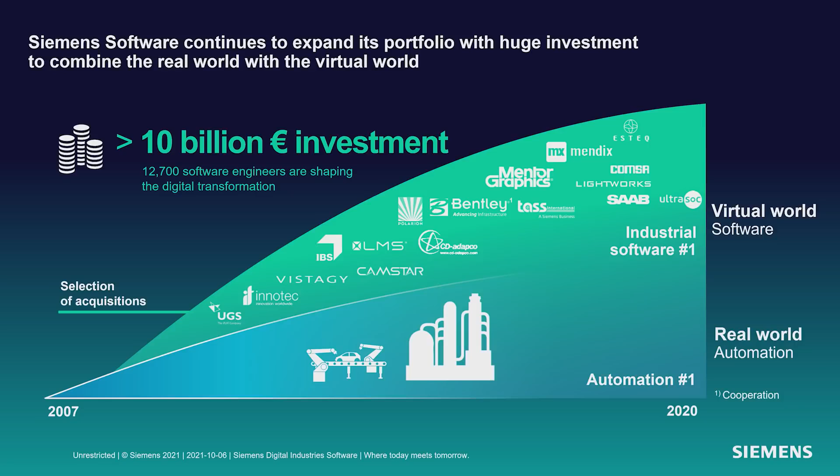One of the reasons we're able to do this is our investment. Over the past 14 years, we've invested more than €10 billion in bringing in new functionality to Siemens. In fact, Siemens is one of the top 10 software companies in the world. This allows us to bring you Xcelerator. Xcelerator is an integrated portfolio of software, services, and application development platform that really speeds your digital transformation. So no matter what you're doing, whether it's mechanical, electronics, manufacturing, we have you covered.

And it all starts with Solid Edge. Solid Edge is your on-ramp, if you will, to digital transformation. You're probably familiar with lots of Solid Edge capabilities for sheet metal, 2D drafting, etc. But maybe you need to go beyond that with the whole Solid Edge portfolio and Xcelerator, whether that's managing that data, doing technical publications, simulation, electrical, it's all there for you.

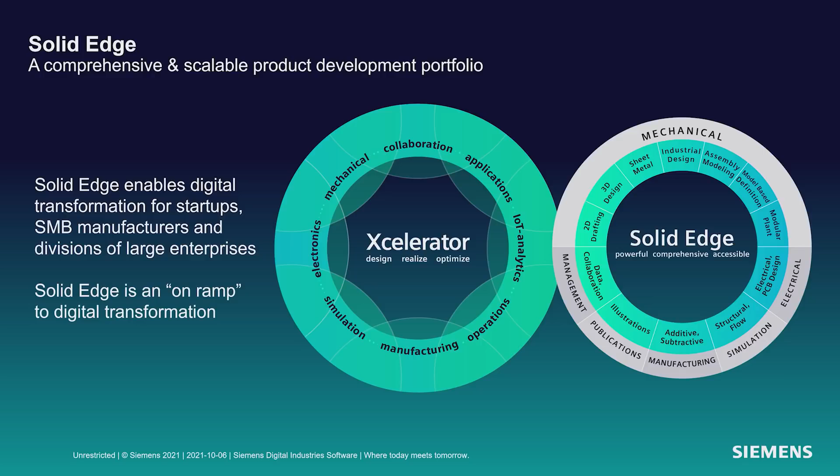And what we see is customers doing amazing things with Solid Edge and the Solid Edge portfolio. For example, Innovates. Innovates is a company in Belgium that makes mobile charging stations. And they're able to take Solid Edge and PADS Pro and use those two together to do great things. As you see, they don't find that level of integration in other engineering software.

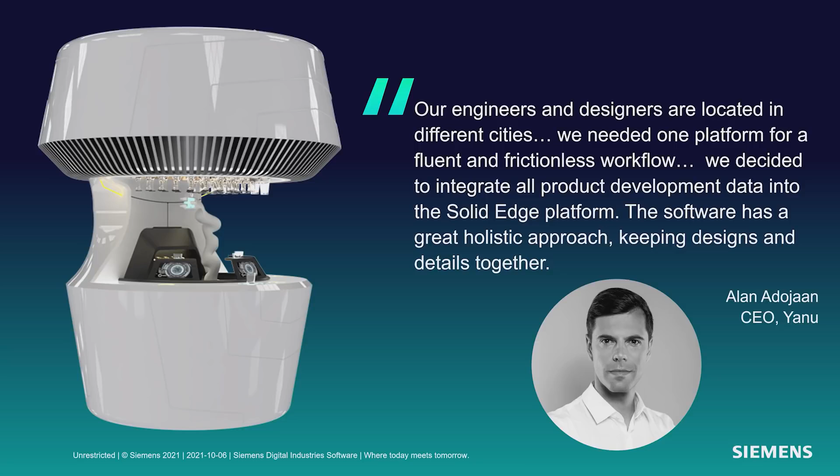Another great example is Yanu. They make the beautiful product you see on the left here. What product might that be? Probably something you've never seen before. This is a fully automatic digital bartender. It can recognize you, make the proper drink, do the proper billing, all contactless, very important today. And I love what Alan has to say. The software has a great holistic design approach, and that's what we like to see and how we can bring you more productive software.

So let's talk about Solid Edge 2022 itself. Solid Edge 2022. Engineered to grow your business. There's so much in it, we'll only be able to cover some of it today. Things like Xcelerator Share, allowing you to collaborate with customers and suppliers. Or CAD Direct, bringing CAD files from other systems directly into Solid Edge seamlessly. Point cloud visualization, big scans of plants, being able to design your equipment in context of that big scan. Solid Edge Design Configurator, a whole new capability to configure your designs quickly and easily for your customers.

Now, as we go through our discussion today, we're going to be using two different data sets because there's just so much to see, such a broad range of functionality with Solid Edge. We'll be working with an espresso maker from Fiamma, a company based in Portugal. And we'll also work with a product from Bergner, a company based in Switzerland that makes chemical and pharmaceutical custom machinery.

So let's start by talking about mechanical design. And let's start with CAD Direct. CAD Direct lets you seamlessly integrate data from other systems into Solid Edge without translation and automatically take updates. We'll also talk about convergent modeling. We've been working on this technology for several years now. It's getting very sophisticated. The ability to integrate mesh models with BREP or solid models in one seamless way. So let's look at that with Jeff now.

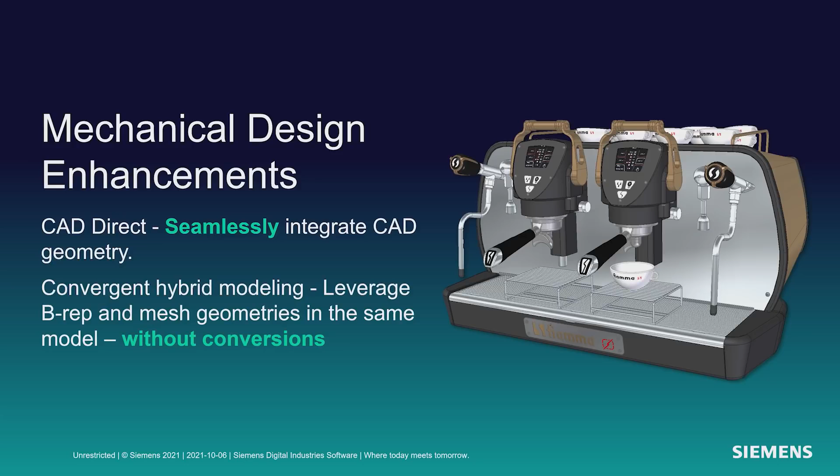Thanks, Dan. First, we'll take a look at subdivision modeling. In this example, we will add support members to the base of the Fiamma espresso machine. The new subdivision bridge command can be used to easily connect edges or faces of subdivision cages and create a lofted structure between them. Here you see an example of that, where we'll select the faces of each subdivision model that we want to loft between.

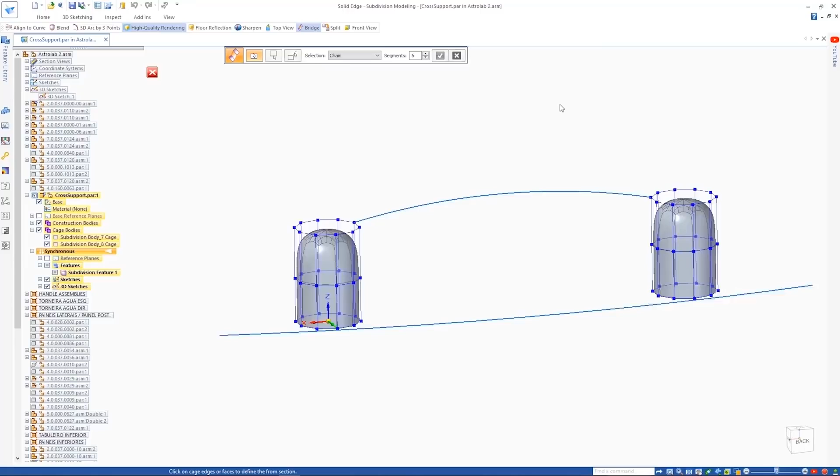Then we'll add the control curve to help us further define the overall shape. Next, we'll be using the new Align to Curve command to further define the shape of the part. Simply by selecting the cage vertices to define the direction and then picking the curve, those vertices are automatically mapped to the curve. You can even sketch your own shapes and curves inside the context of the command. Even gesturing is supported for inking of your curves.

Here we'll show another option called Split with Offset to add some pockets to support the rubber feet of the support. A simple selection of the edges with an offset allows you to pull to create the pockets for those rubber feet.

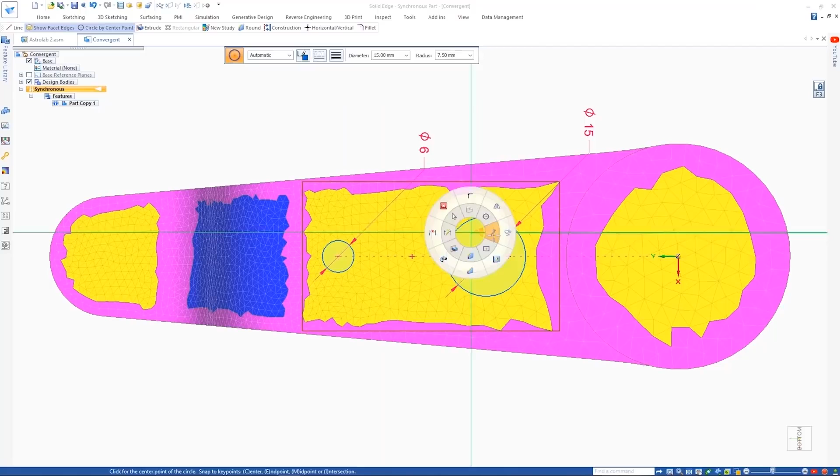Next, we're going to replace the handle with a new design that's been 3D scanned. The result is a mesh model that we import. We can visualize the mesh with the new Show Facet Edges command. In this case, we'll clean up this model a little with the Remesh command. Now, faces have automatically been identified and the sketches are added to the planar faces of the mesh.

We add a series of cutouts in order to reduce the weight and improve the appearance of the part. Notice the resulting geometry isn't faceted. Solid Edge now seamlessly combines mesh and B-rep geometry in the same body or part. We'll add additional cutouts to reduce the material. Once the cutout is complete, it can be patterned.

Finally, we're back in the assembly where we'll replace the current handle with the new meshed handle. But you'll notice the mounting holes are missing from the component. This can easily be solved by doing a Boolean operation using the mesh model as the target and the components from the assembly as the cutting geometry. These new capabilities further enhance your ability to use mesh models in your design process.

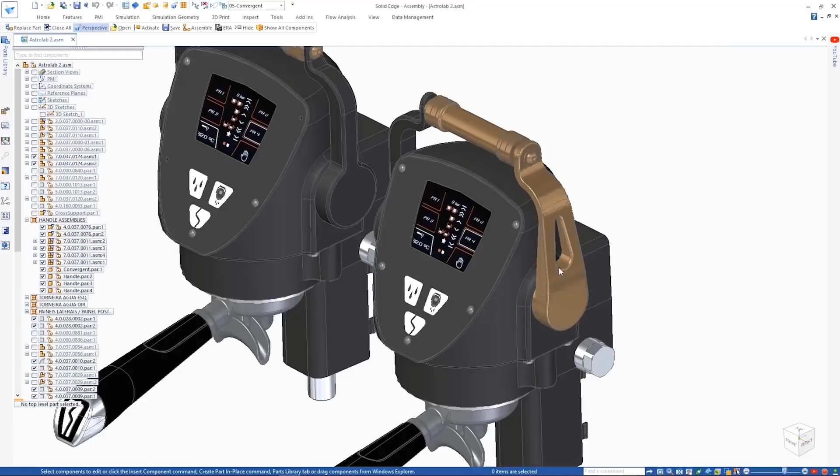Now we'll use the new component finder in the Solid Edge Pathfinder and we'll search for the desired filter holder handle, which is designed as a family of assemblies. One of the versions is designed for a double espresso shot, the other is a single espresso shot. Opening the drawing of this assembly, we'll use the new family of assemblies parts list to place a table and detail the parts used for each member.

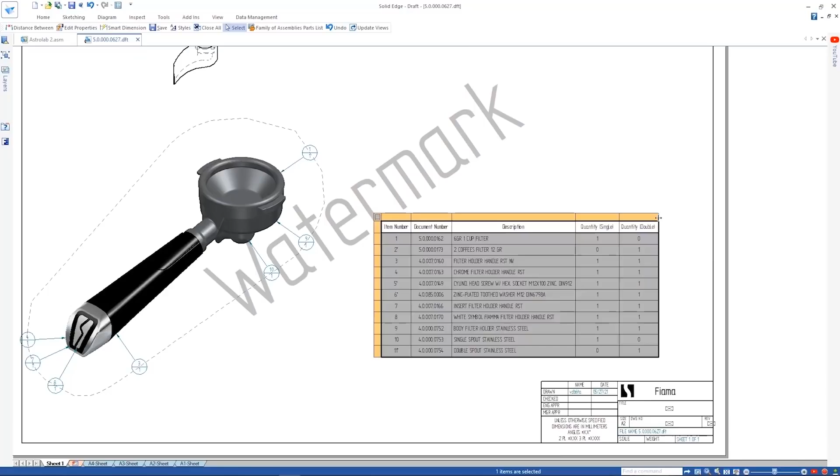Now we'll look at some enhancements to dimensioning in Draft. Dimensioning to virtual intersections or arcs of rounded edges is now supported. We can also choose to display projection lines to those intersection points. Watermarks are also used to convey important information on the drawing. We'll change the existing one so that it retrieves the document status for the drawing property text.

The new CAD Direct command enables us to use foreign CAD data, geometry, and assemblies in Solid Edge directly without requiring any translation. The coffee boilers that you're looking at here were designed in NX. Once inserted into Solid Edge, they can be positioned just like any other assembly. Since we need two of these, we'll simply copy one to create the second.

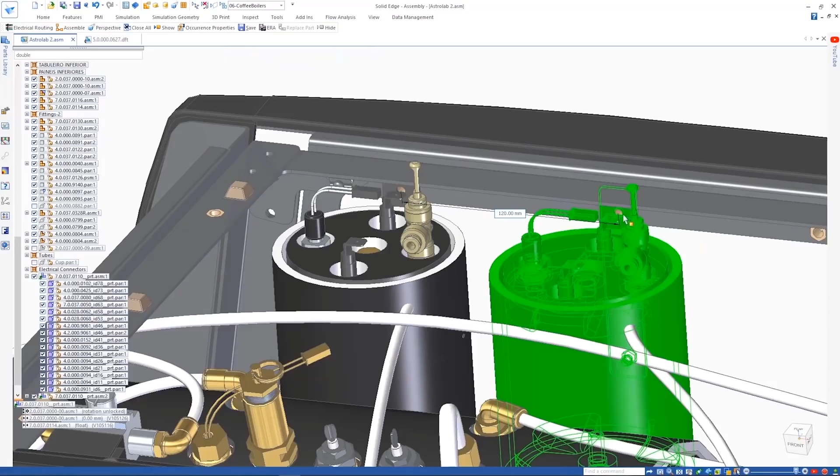Notice the boilers aren't quite in the right location. We'll go back into NX and make the changes needed to the mounting bracket such that they'll be in the right position. Since Solid Edge has associative links with NX, a simple update brings the changes in.

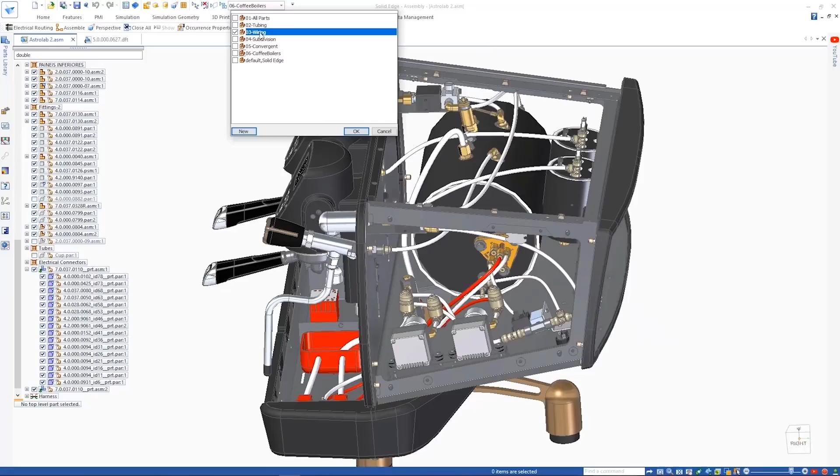Next, we'll look at electrical routing enhancements. Solid Edge now supports the display of bicolored wires, allowing us to change the display of this ground wire to be striped green and yellow. Various pattern types are supported as well, including single stripes, helical stripes, zebra stripes, and dashes.

And finally, KeyShot, the best-in-class rendering solution, also sees some impressive updates. Decals defined in Solid Edge may be automatically transferred, saving time and effort, which can be seen here on the logos and the cups in the digital scene.

Back to you, Dan. Thanks, Jeff.

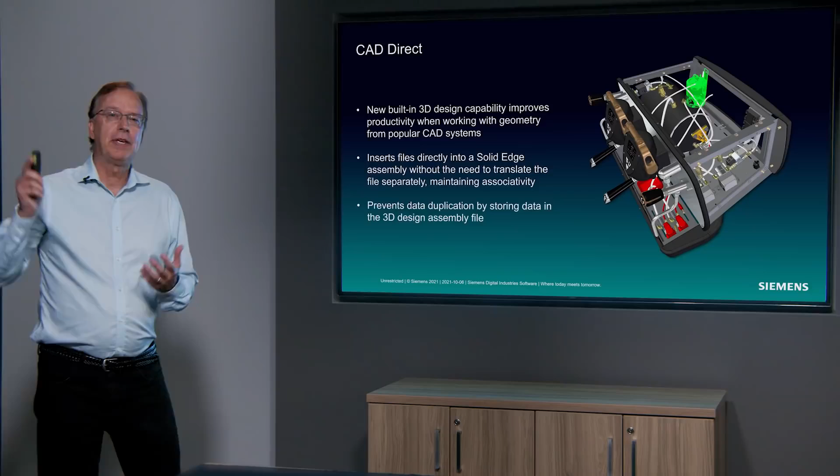Lots of amazing stuff in there, but I'm only going to highlight a couple things here that I think are real game changers. CAD Direct. So you have the capability you've seen to get an NX assembly into Solid Edge directly, no translation. And when you make edits to that NX assembly, it comes into Solid Edge automatically. There's no extra files to manage. You don't have to worry about that. It's all CAD Direct.

And what about convergent hybrid modeling? You saw taking triangle meshes and B-rep solid models, pulling that all together into a single cohesive model, significantly reducing your design time.

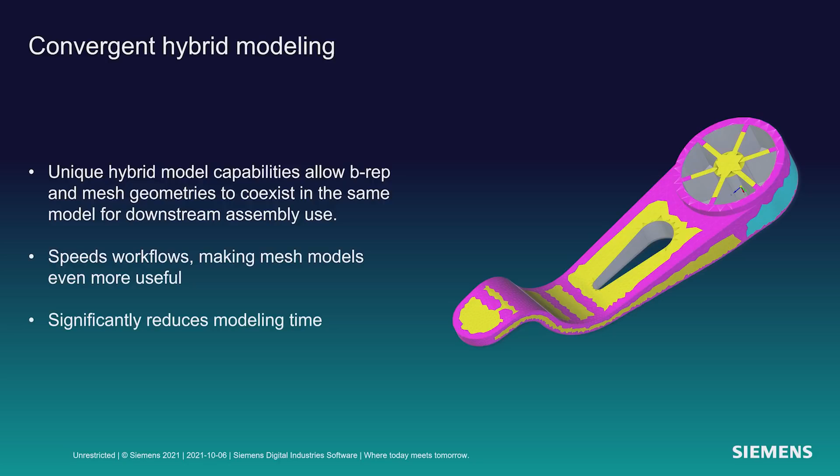Let's talk about some other mechanical design enhancements, some other great things in here. Point clouds. It's becoming fairly common to be able to scan an entire plant or factory and bring that data forward. We can now bring that data into Solid Edge so that you can design in the context of that factory or plant.

What about large assembly modeling? We see people first building parts, then assemblies, then whole factory lines. Assembly modeling in Solid Edge keeps getting faster and faster, best in the business. And Synchronous Radiate, an amazing new command within the synchronous modeling environment that allows you to deal with radially symmetric parts and edit those effortlessly. So let's take a look at that now, Jeff.

Thanks, Dan. Well, the first thing we'll do is we'll take a look at a new assembly preview mode. This mode allows you to very quickly open Solid Edge components and very large Solid Edge assemblies lightning fast. In preview mode, you can manipulate the view, show and hide components, and apply display configurations. In this case, we'll isolate the most critical part of the model that we want to edit using a configuration. Then we'll simply tell the system how we want to open, and open only the components that are to be edited, saving you time and memory.

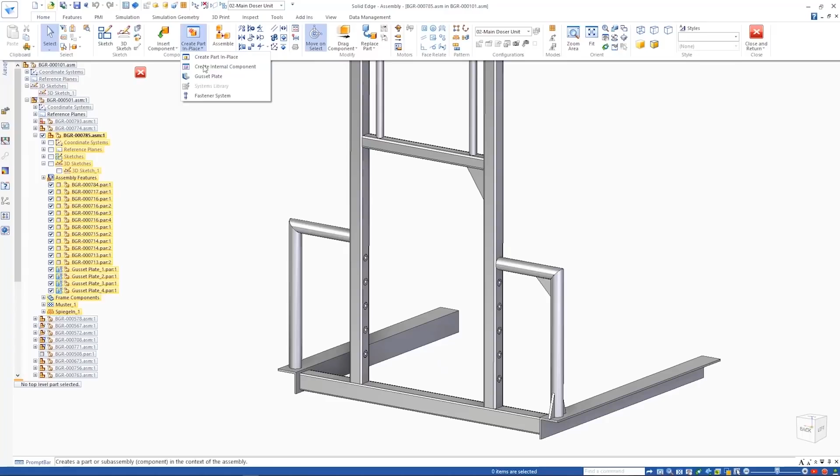Another time-saving enhancement is the gusset command. We now allow you to automatically add gussets to a frame structure. Here you can see the user interface. You can define these gussets in any shape and size that you desire. Then you simply select the frame element, position where the gusset is to go, and the system automatically creates the component there.

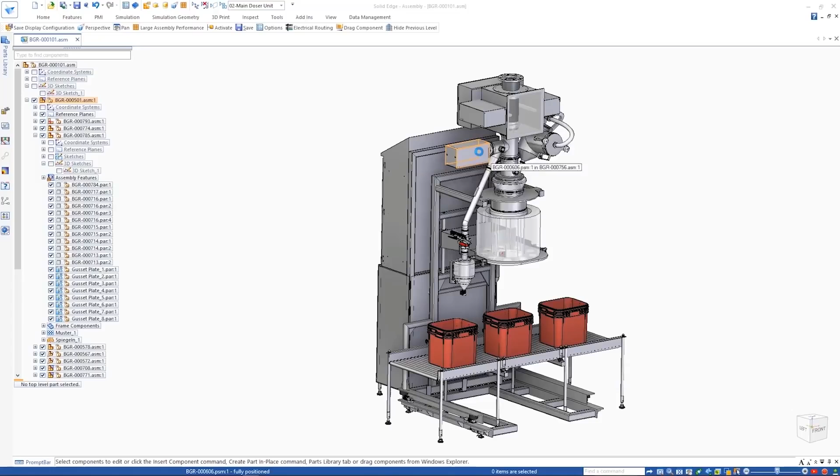If we continue down the internal components theme that we introduced in the last release, we now allow you to create an internal component and actually create the model geometry directly inside the Solid Edge assembly. We've introduced this new assembly modeling capability that gives you the ability to create the entirety of a design without any need for an external file.

Here we have a pneumatic cylinder which will be imported as an internal component. We need to add a bracket to this assembly, but since it's a purchased part, we'll just create this as an internal component. And again, saving the need for external tracking of files. If you'll notice during sketching, a pop-up menu allows you to quickly access commands that are relevant to your selection. And this is new for Solid Edge 2022.

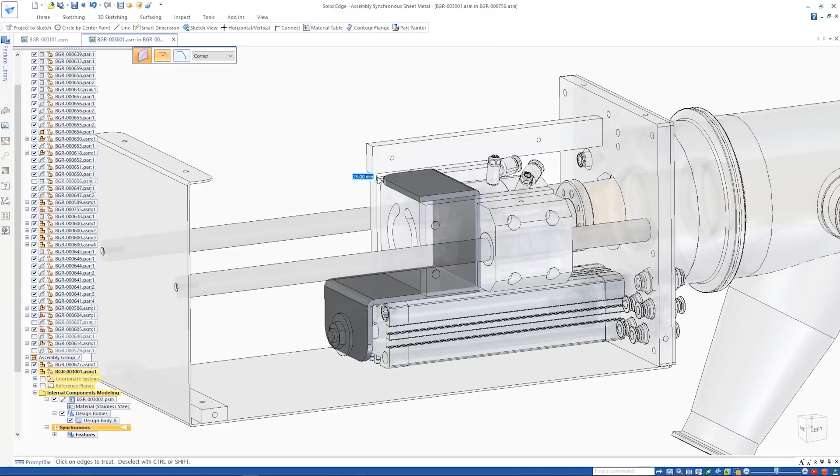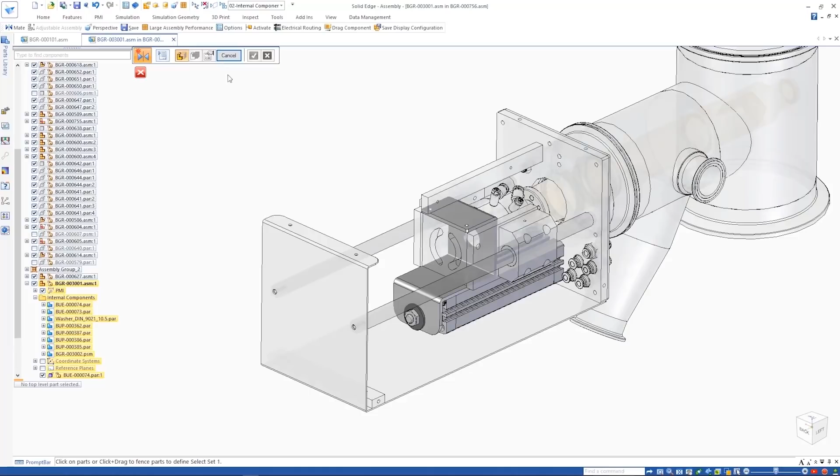So we've defined our sheet metal part. We also will have to give it a material definition and a gauge definition. In addition, we're able to create geometry and reference the components from the assembly, whether they're internal components or they're real components in the assembly. So again, we're defining the material gauge for the sheet metal component, and we've defined this component completely inside the context of this assembly. You're also able to drag the component, doing animations using both internal components as well as the real component combined.

The new component finder speeds up the process for locating parts within the assembly. You simply key in the name and it finds the list quickly. Here we found a shaft, and we use the new Radiate command to edit the radius or the diameter of the shaft component. You simply select the shaft, putting the component in the select set that you wish to change, and then Synchronous does the rest. In this particular example, we want to include the pocket in the Radiate and the offset option. Simply selecting that pocket and including it allows that to be done.

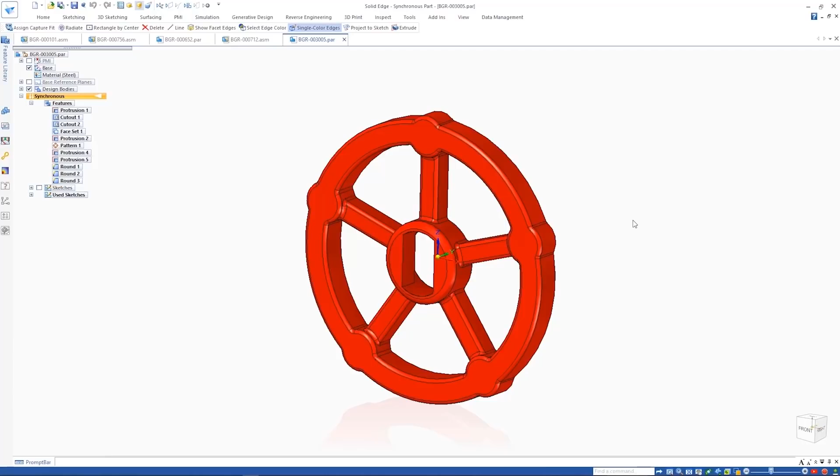A new Assign Capture Fit command allows relationships to be predefined on a component while in the context of the part. Here you can see that Capture Fit relationships already exist. We'll add a new Capture Fit to the collection and save it to the component. When I place the handle into the assembly, all you have to do is select the component and select the mating components that you want to mate it to, and the handle automatically snaps into place. It's as easy as that. Here's another example where we have a handle that needs to snap to 5 new locations. Again, the Assign Capture Fit makes it easy.

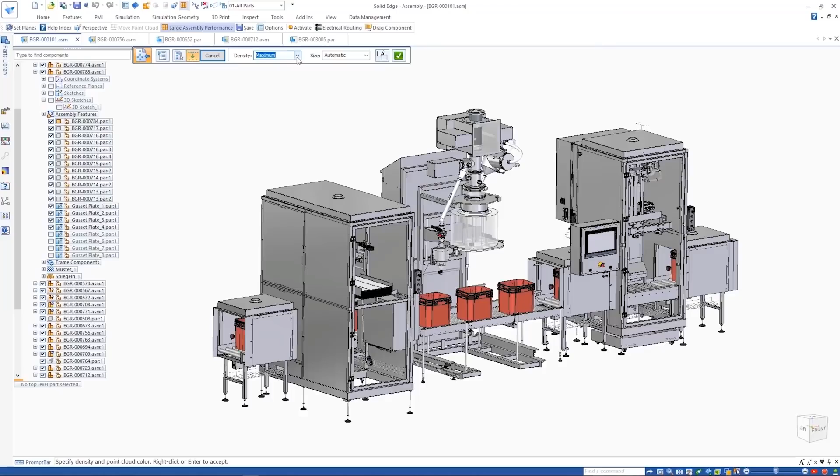Solid Edge now has the ability to place point clouds within the context of your design. This allows you to reference and visually indicate where your components will be placed inside a large assembly. Solid Edge supports multiple point types and then allows you to position your component inside the context of the plant design. The point cloud can be easily repositioned. Clipping planes can be used. You can even measure to the location of the point clouds relative to your design. Here you see that the tank component was in the wrong position and it was moved to match the point cloud and the plant definition more precisely.

And that's it, Dan. Back over to you. All right, thanks, Jeff. So many great things to see in there.

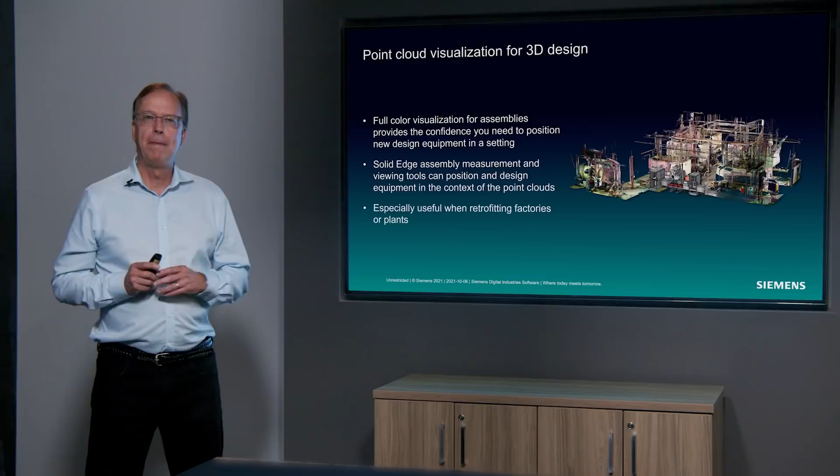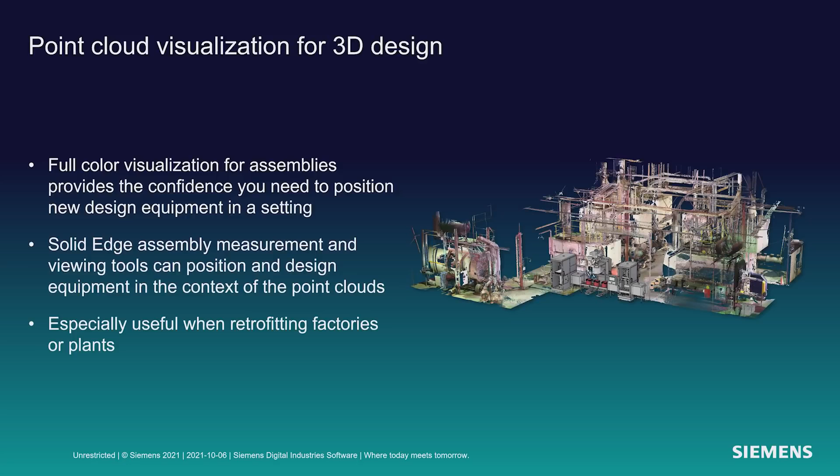But again, something I really want to highlight to you is a game changer: point cloud visualization. The ability to take scans in, gigantic scans, millions or billions of points, and be able to look at those in the context of Solid Edge and be able to integrate your design directly in there and design in context of that point cloud. As you can see, they're full color, they give the full feel of the plant or factory. Really amazing stuff. And we see that our customers really love this new technology. So Benjamin at Bergner, for example, eliminated a lot of tedious manual effort. It's just so much easier with the new point cloud technology.

And what about large assembly modeling itself? Order of magnitude increase in large assembly modeling performance. So you have that preview mode where you can very quickly bring up the assembly, very, very massive assemblies, decide what you want to work on, and then just bring in that bit of the assembly. Really improve your productivity.

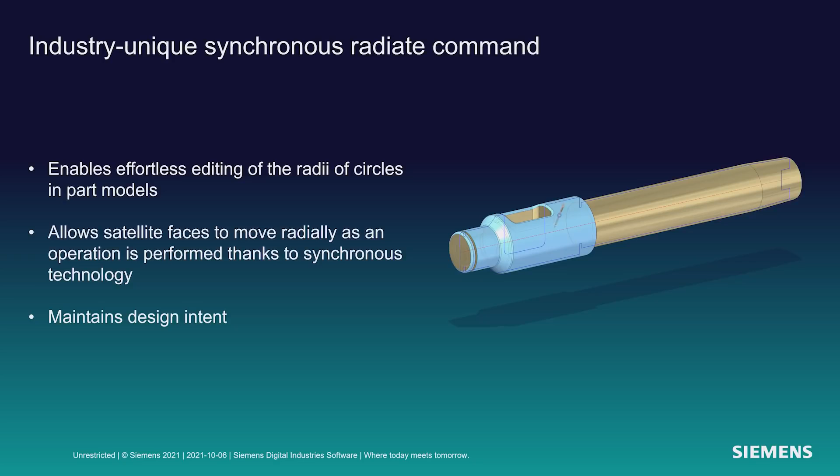And we see that folks are already taking advantage of this. Our beta customers have been using this, like Luca Carminati at CMS. Much, much faster work, save a lot of work on their designs. And what about Synchronous Revolve? Really amazing stuff if you're working on those axisymmetric parts. Being able to make edits without having to do any extra effort happens almost magically. Great stuff.

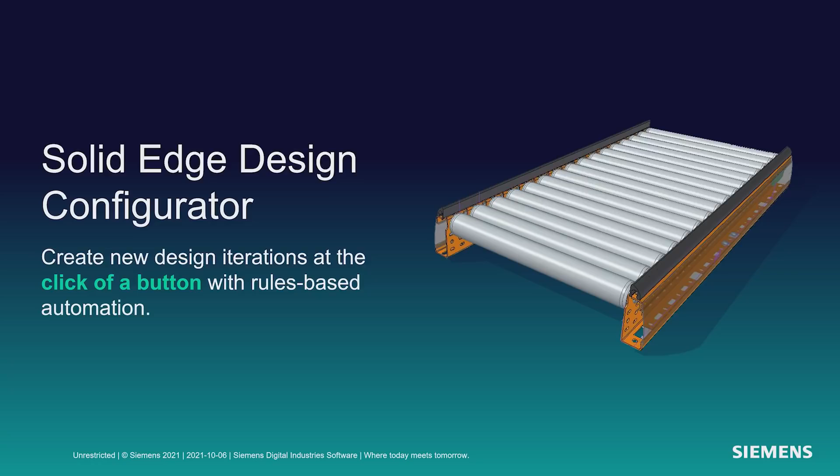Okay, next up is Solid Edge Design Configurator. I'm very excited about this. If you're doing any engineer or configure to order type of products, the ability to very quickly change your designs and have new quotes very quickly. Let's take a look at it with Jeff.

Thanks, Dan. The new Solid Edge Design Configurator allows you to design multiple product variants directly in the context of Solid Edge. In this example, we'll configure a variety of conveyor designs. The first step is to select the component to be configured. The next step is to define the master input parameters of the configuration. In this case, it's the length and width of the conveyor plus the pitch of the rollers. Values can be easily edited for any parameter, and images can be included in order to help the end user identify the needed inputs when configuring the model.

Defining a new input parameter for the pitch of the conveyor, we will quickly configure the name, type, label, and render style to use radio buttons. The pitch value of the conveyor can be customized between 60 and 90. However, since different lengths of the conveyor require different pitches, visibility rules need to be applied. This is done by making use of a simple expression to define the intelligence. Here, the rules are being validated to ensure consistency and proper definition have been made. Here, the function is going to be copied and pasted to allow you to easily reuse formulas without having to include them again. Skipping to the last step of the configuration, we can see the configuration form is properly created.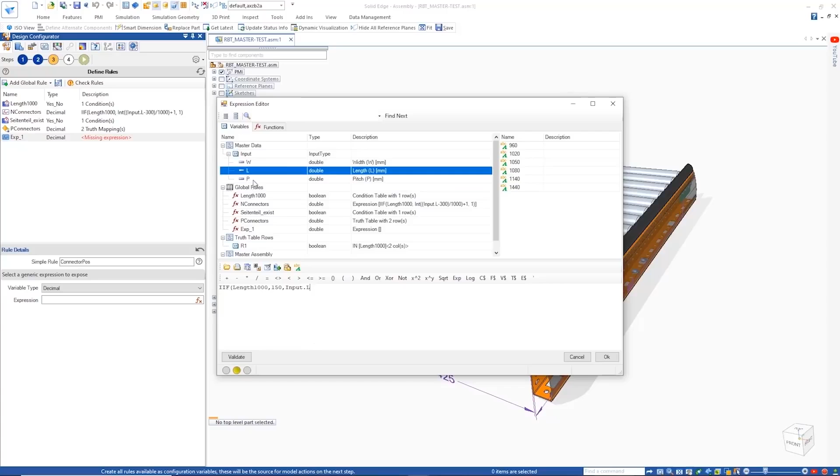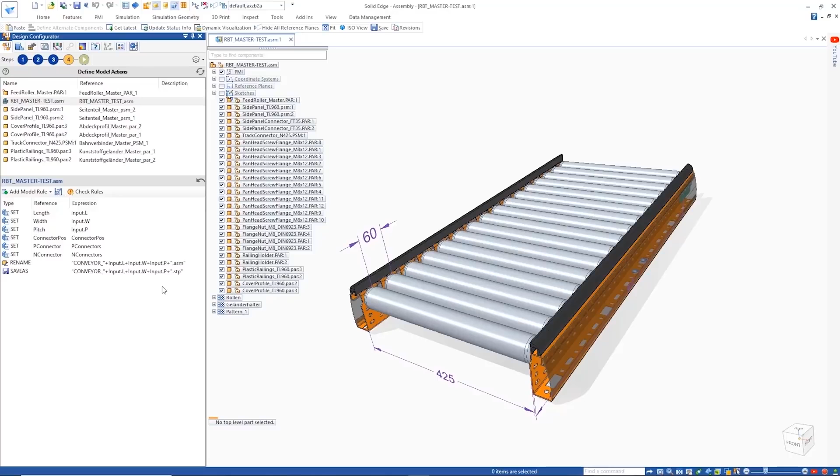Next, defining the rules for the process. Here we have multiple rules to drive and configure the connectors at the bottom of the conveyor. We will use a combination of simple condition and expression rules and a truth map table to work out the number and positions of the connector. All rules can be quickly validated. Finally, we specify the actions to be taken. Here, variables are set and components are replaced to satisfy the input parameters. A rename model action will ensure our final assembly will be renamed appropriately and also create the other necessary outputs, for example, a STEP file as shown here.

Now we can run it quickly and create as many configurations as needed. A newly generated configuration can easily be shared with Pack and Go. The configuration logic is all stored within the CAD model. There's no need for any further plugins or external resources. And with that, Dan, I'll hand it back to you. All right, thanks, Jeff.

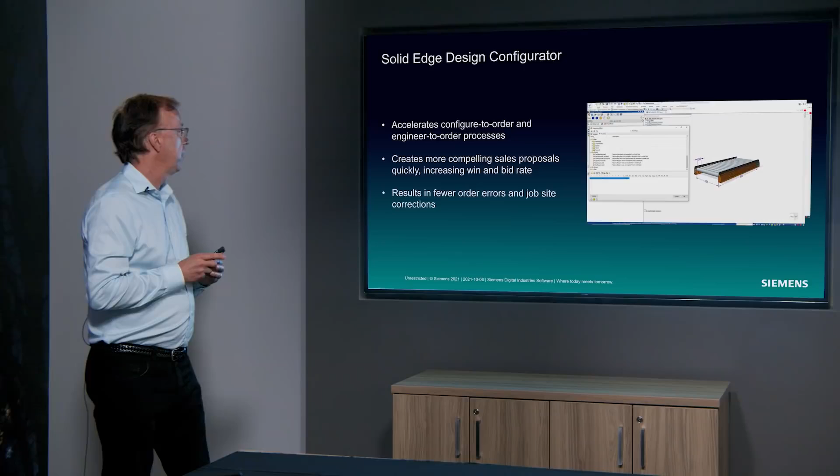So as you see, with the Solid Edge Design Configurator, you can accelerate your configure to order and engineer to order processes and create compelling sales proposals. You're also going to see that it really error checks for you and it creates a nice dialogue for your users to interact with so you can very quickly configure new products.

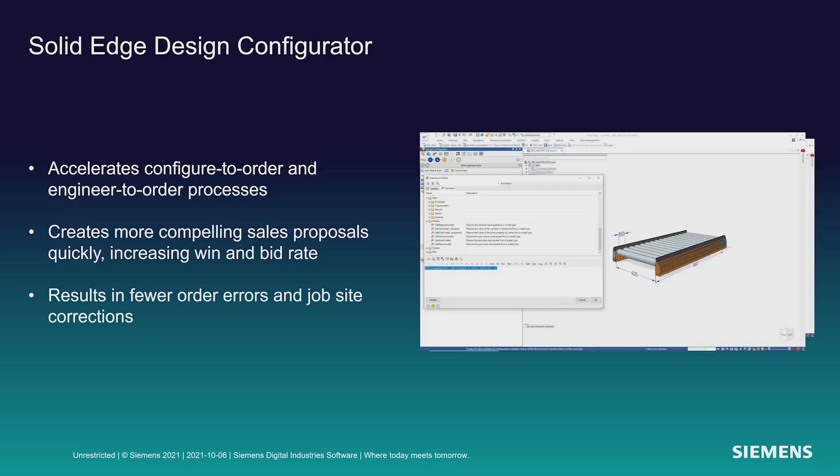What about CAM, Solid Edge CAM Pro? Tried and true technology developed over the last 40 years. A lot of users are using it today and enjoy the benefits of it. But what if that technology was available to all of you, all Solid Edge customers on maintenance? That's what we want to introduce to you today with Solid Edge 2022. Jeff. Thanks, Dan.

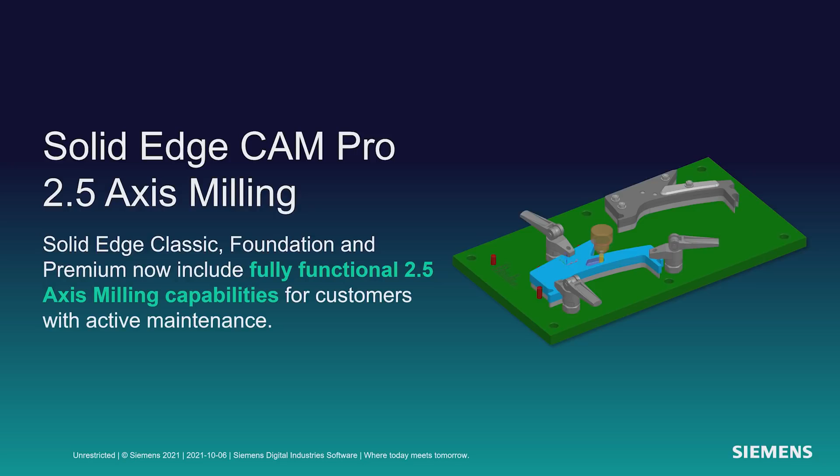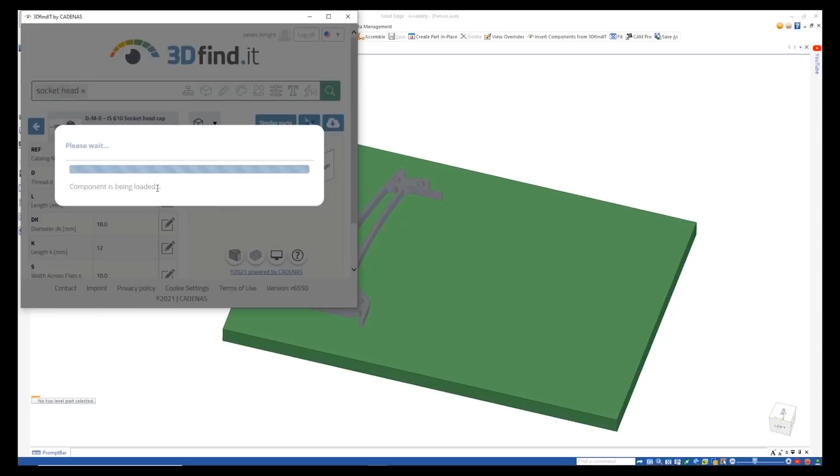Here we'll be using Solid Edge CAM Pro to create the manufacturing toolpath for the rear legs of the Fiamma espresso machine. First, we'll use the Solid Edge assembly tools to create the shape to represent the stock parts, and also the parts that form the fixture assembly, which includes the standoff plate as well as additional fixing holes from the standard database. We will also make use of the supplier catalog in 3Dfind.it to get the appropriate socket head cap screws to be used to fix the component in the fixture. So as you can see, Solid Edge is a great CAD for CAM tool.

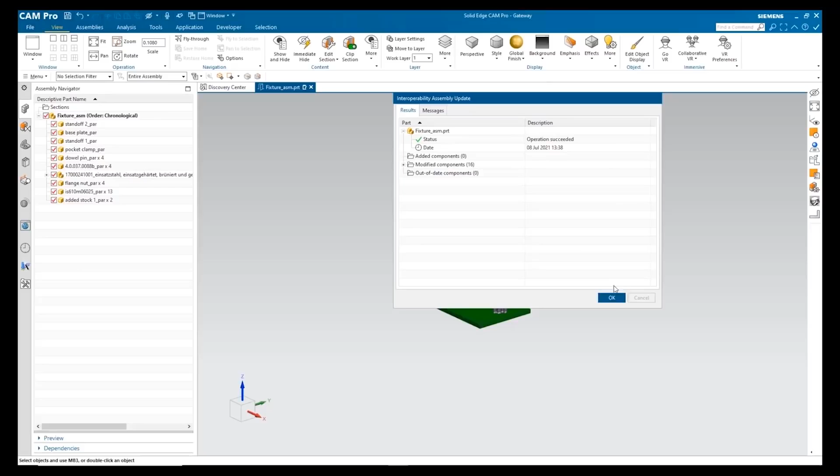We'll need to machine this in two separate steps. Step 1 is to mill the pocket and drill the holes, and step 2 is to machine the profile. One click will send the entire assembly to the Solid Edge CAM Pro application. Note that associativity is maintained to the complete assembly, so if there are any last-minute changes, we can quickly update them and continue the NC programming process.

New for Solid Edge CAM Pro is the ability to create adaptive roughing toolpaths for 2.5-axis operations. This is included at no additional cost. These are faster than traditional toolpaths and extend the cutting life of your tools. Notice the advanced graphic capabilities for validating your toolpath.

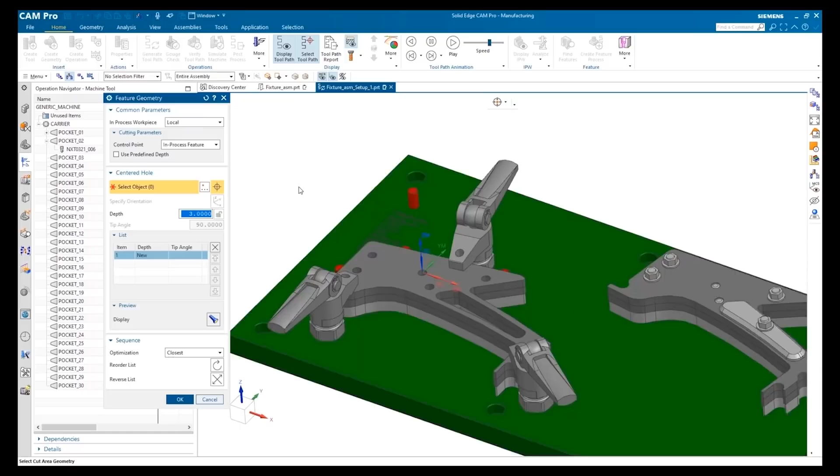Here we'll create spot drilling operations for the 5 holes in the support. Notice the graphical pop-up hints that help us with operation selection. Graphical helps are also available for geometric selection. Each time we select a hole, we get a preview of the machining that will take place. Again, at any point in the process, we can get visual feedback on our decisions.

Now that our CNC program is complete, let's run through the whole visualization process. Notice you get to completely visualize the entire machining process before committing it to machining. Of course, no job is finished until it has been post-processed for a specific machine.

That's where PostHub comes in. It's an online database of over 1,200 post-processors. You can easily filter and find exactly the one you need. Also, PostHub is constantly updated, bringing you the most recent tools. And Dan, with that, I'll turn it back over to you.

All right, thanks, Jeff. I'm really excited about this. There's a great heritage in Solid Edge CAM Pro and our machining technology over the last 40 years. Many people enjoy that technology, but now every Solid Edge user who's on maintenance can enjoy that technology and work with Solid Edge CAM Pro.

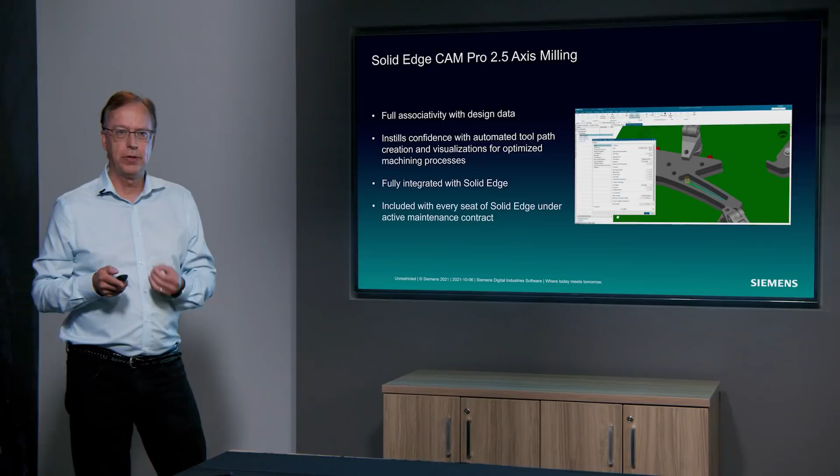Next up is Xcelerator Share. I'm super excited about this. It's a functionality in Solid Edge that allows you to collaborate with colleagues, suppliers, customers very easily. Nothing for you to set up, works on all sorts of devices. So let's take a look at that.

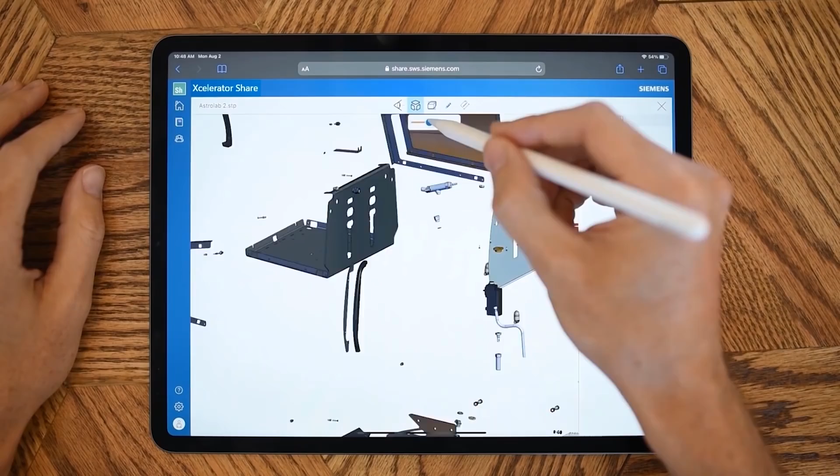Jeff. Thanks, Dan. Xcelerator Share allows you to import your CAD models into a secure cloud location. Within that context, you can view, you can rotate, you can show/hide, you can 3D section, you can even do measurements and markups. Here, a reviewer has identified the need for some change in the design. The location of the change is identified by a sticky note and a place describing the needed change.

Xcelerator Share offers maximum traceability, as all markups are recorded, enabling conversations back and forth on any of the issues you're tracking. It also records who made the markups and when it was made. We can also easily go back to the markups at any time. Simply save your markups and send them to the designer for review.

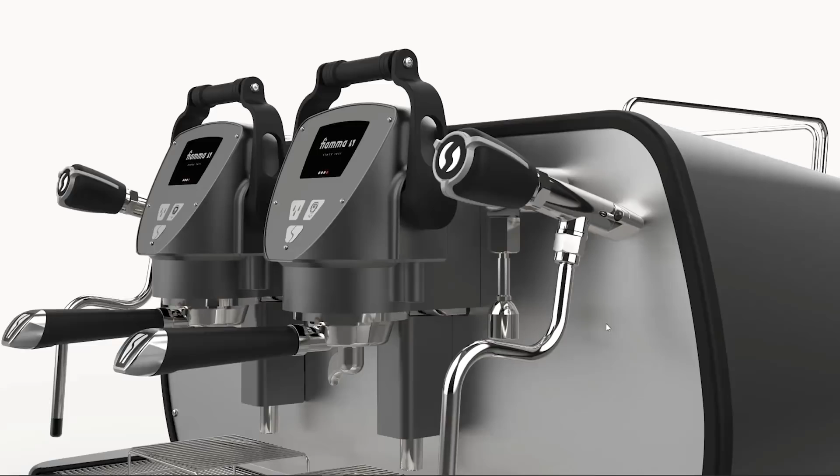With Share, you can also directly connect to Solid Edge, synchronizing your data from your desktop to the cloud. Here we have the same project on our desktop. It's represented simply as a folder. Any data that we have in this folder will get synchronized in the background. In Solid Edge, we can securely sign in to Xcelerator Share and see those same cloud-based projects.

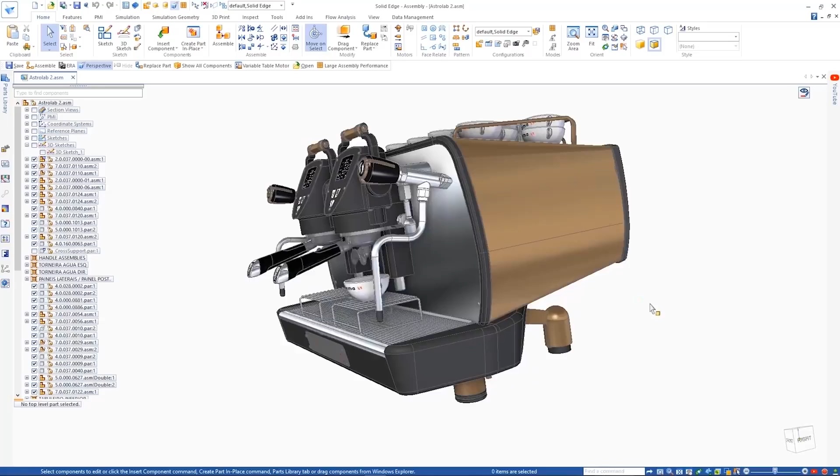The Espresso machine can be opened and we can go right to work on the part in question. The designer can easily access that same markup in the cloud directly from within Solid Edge. Once completing the change, another markup continues that two-way conversation and collaboration with other stakeholders so that the issues are tracked appropriately.

Another great feature of Xcelerator Share is the ability to share a project with anyone. Simply enter the email address of the person with whom you'd like to share and choose their access permission level. Here we can choose View, or View and Download, or Edit and Download, depending on how you want to protect your intellectual property. We'll share this design with one of your colleagues and our customers and give them the appropriate access.

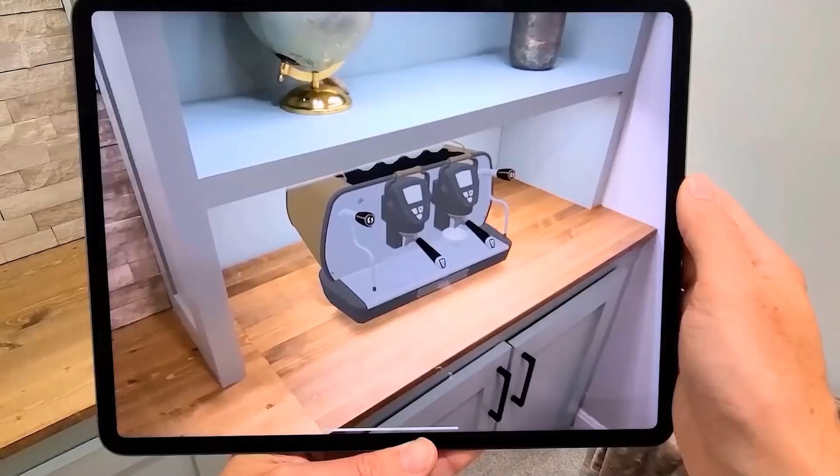Finally, with the Share Augmented Reality feature, you can see exactly how your designs will look in the real-world environment. Snap the design onto any surface seen in the camera lens at the correct scale. The finger gestures can be used to manipulate the model and easily visualize what your design looks like in a real environment. So back over to you, Dan.

Thanks, Jeff. All right, Xcelerator Share. Really great stuff. Next generation cloud-based collaboration that allows you to work inside your company with colleagues or work with suppliers, work with customers. Nothing for you to set up. Works on every device. So whether you have a Mac or an iPad or a Chromebook, it works on all those devices with no special setup. And you saw the ability to write notes that are automatically converted to text, share those markups. Very exciting stuff.

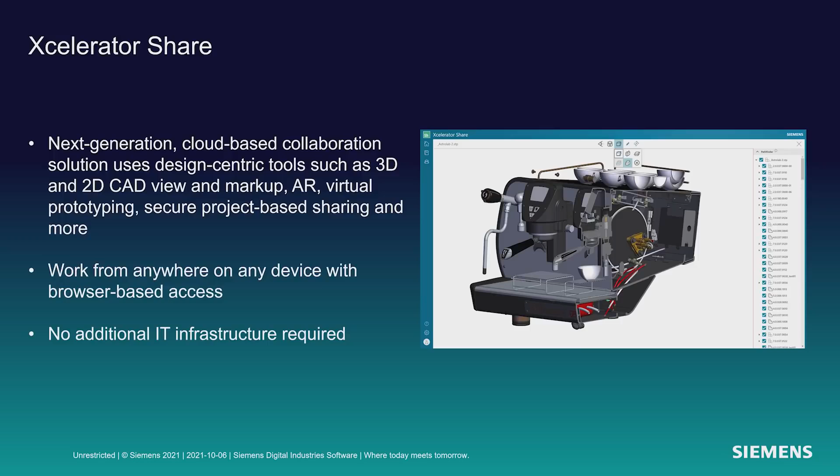Next up's dynamic visualization. You make complicated products, large assemblies. How do you know which parts are from which supplier? Or which parts are of what material? Dynamic visualization will help you with that problem. Let's take a look at that now with Jeff.

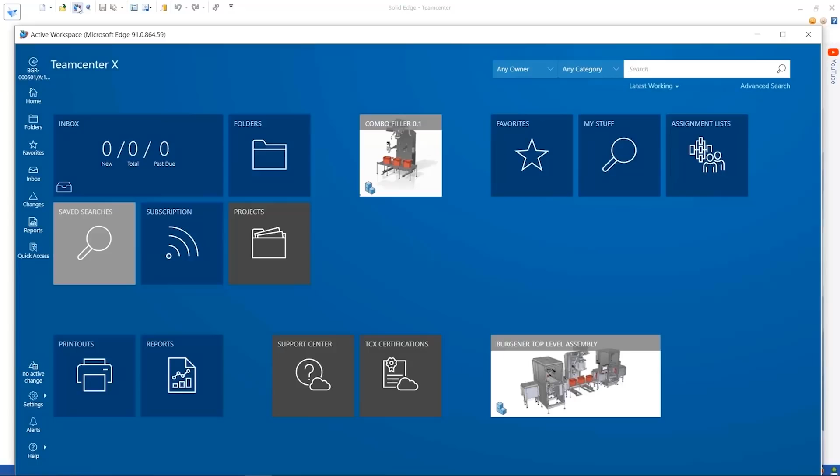Thanks, Dan. Dynamic visualization gives you the great capabilities to generate visual reports of your assembly. So what we'll do here is we'll open a Solid Edge assembly using Teamcenter Active Workspace. We'll create a visual report based on the component supplier and the material definition.

So the first thing you'll do is you'll add columns to the user interface, those columns that you want to filter on. Here we've added suppliers and material. So for each of those, we'll filter on the particular material and the particular supplier that we're interested in visualizing.

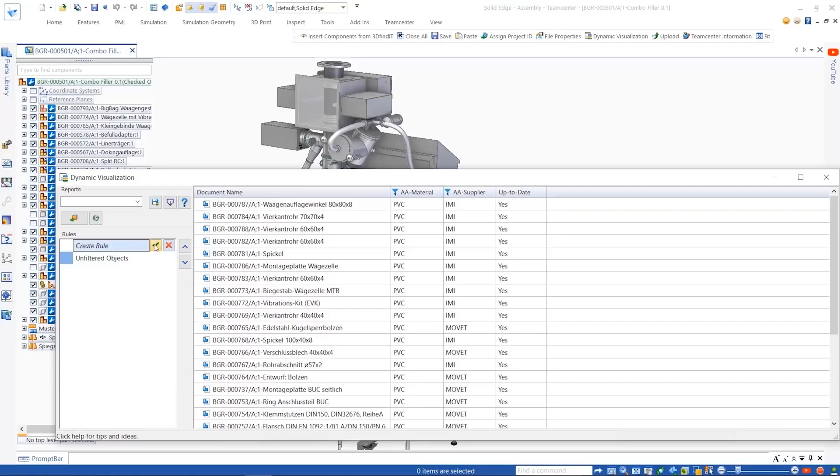So once the rule is created, you simply apply the rule and the model changes display to show you the rule definition. And here you can see in red the components based on that supplier and that material selected. You can also export these rules and import them into various assemblies.

Here we have a rule that allows us to identify which user created which components. We'll modify that rule to allow us to identify work in progress as well as components that are created by Pat. We can highlight those, select those, and then go into edit mode. Here we'll see we need to add a warning light to this box.

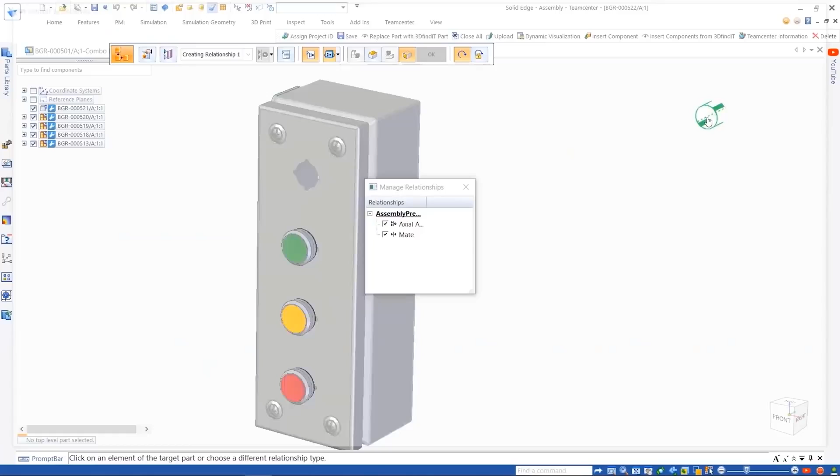We use 3DfindIT to find the particular light from the particular supplier that we want. Once we've identified the right one, we'll generate the component in Solid Edge. But in this case, the component already is contained in the Teamcenter database. So instead of replicating that in the database, we'll simply reuse what's already there.

Also in Solid Edge 2022, we were able to take advantage of the project definitions within Teamcenter. Here we can see we've assigned the components to a particular project in Teamcenter.

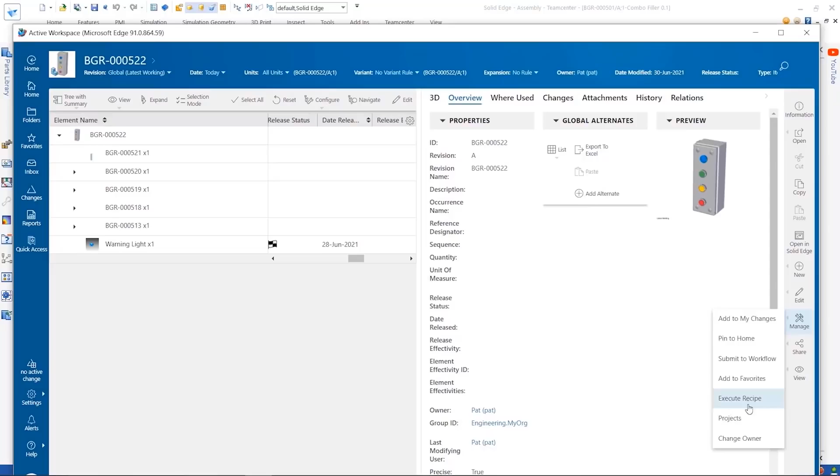The Solid Edge built-in data management also supports dynamic visualization. Here again, we'll display the assembly coloring based on the material type to ensure that we have the proper materials throughout the model. So again, the rule is applied, visually it's displayed, and you'll notice that the red handles should be green. Those should be stainless steel and not aluminum. So we'll send those back to the designer to be reworked and the proper material to be applied.

So once applied, we can then do an auto update of the status, and the system will automatically show us the status and then update to get the latest component. In this case, the handles are updated with the proper material. We will rerun the same rule, and you'll see that now the handles are green and therefore in the correct material.

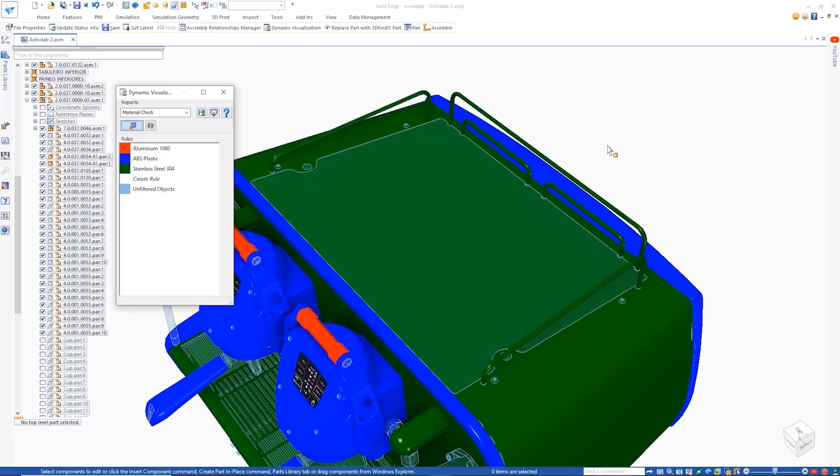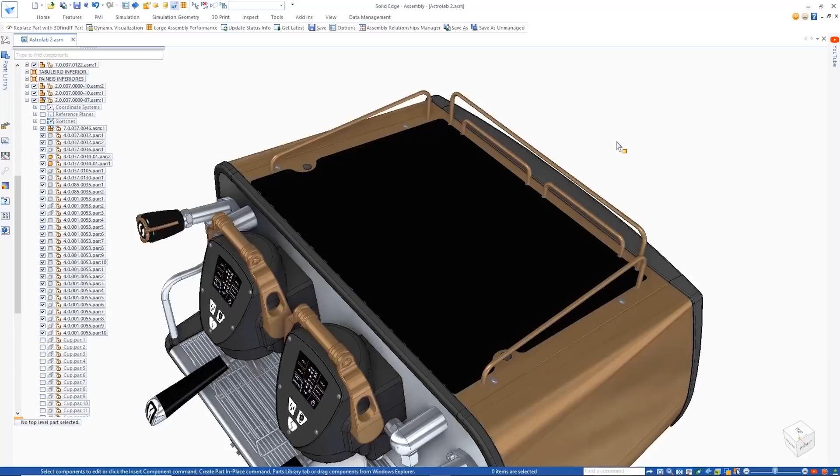This next example will use replace part with 3DfindIT. 3DfindIT has the ability to take a component and use that component geometry to search the catalog database for similar components. Here, once the component is found, we identify the supplier that we desire, and with a few simple clicks, that component is inserted into the assembly, replacing the previous geometry.

And lastly, we've added Pack and Go directly to the Windows Explorer UI, making it easy for you to share your data without having to open the assembly within Solid Edge. And that's it, Dan. Back to you. All right. Thanks so much, Jeff.

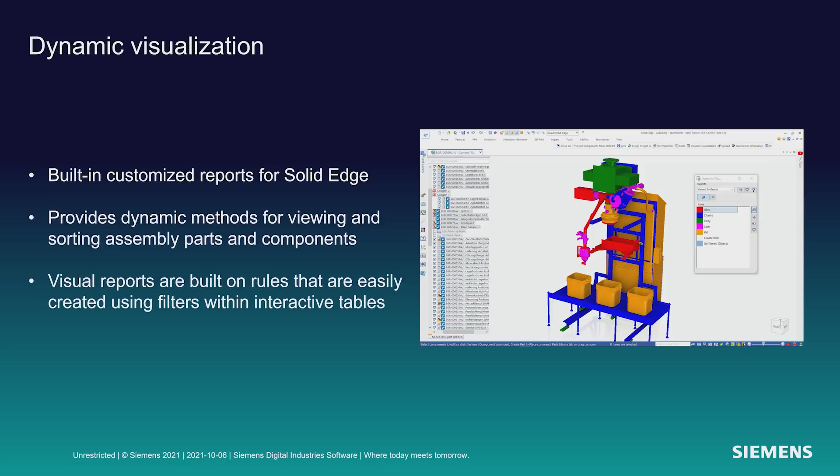So many good things you saw in there with 3D Find It and the ability to replace components, search directly using geometric shapes, and so on. But I want to highlight to you this dynamic visualization. Being able to say, well, what supplier do I have for the different components? Color code for me all the things that are stainless steel. Color code for me all the parts that are in work. Amazing technology that would save you a lot of time and money.

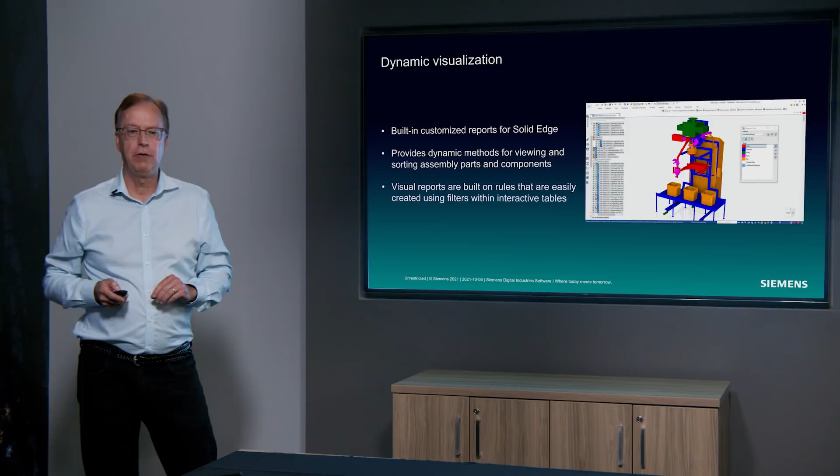Next up is Solid Edge Simulation. We have some great enhancements in there, some game-changing enhancements in terms of the ability to remesh parts using the body mesh command, and some other great tools. Let's take a look at those, Jeff.

Thanks, Dan. We'll start by looking at a new boundary condition allowing the user to apply hydrostatic pressure to a model. So we'll apply configuration that gives us the geometry of interest. Here we want to look at this tank on the left and do an analysis, assuming that tank is filled with liquid.

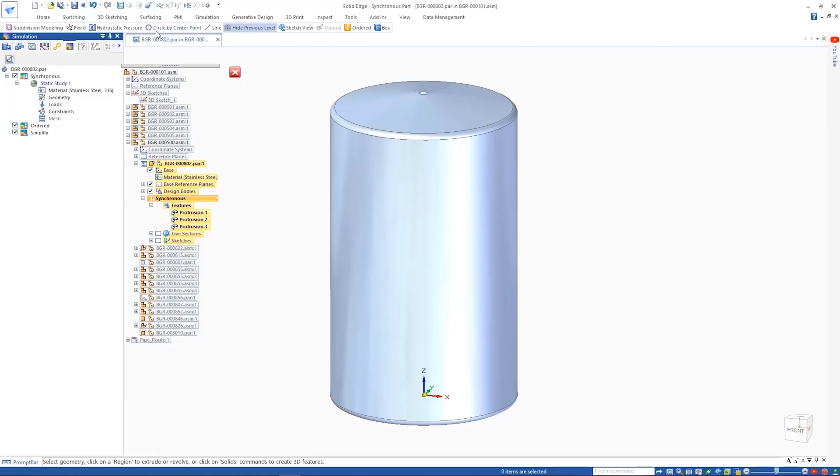So we'll create a hydrostatic study, and in the definition of the loads, we'll use the new hydrostatic pressure command. All you have to do is to identify the surface to apply the load, identify the depth of the liquid in the tank in this case, and then provide the density of the liquid within the tank. Solid Edge will do the rest.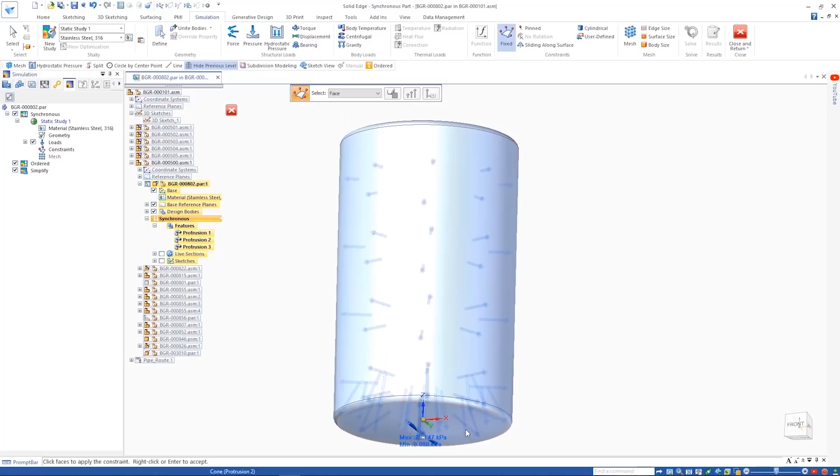To finish the analysis model, we'll apply constraints to the bottom of the tank and then perform the meshing and analysis as needed. Notice on the new mesh dialog a body mesher. This is proprietary technology from Siemens that does a really good job meshing complex models. Some things that couldn't be meshed before can now easily be meshed much quicker and much more reliably than in the past.

So here you see the result of the hydrostatic pressure load in this tank. We'll change the liquid level in the tank and run the analysis again just to validate that this tank will withstand the pressure exerted on it in production. There you see the animation of the stresses, and they show up in the obvious place at the bottom of the tank where you might expect.

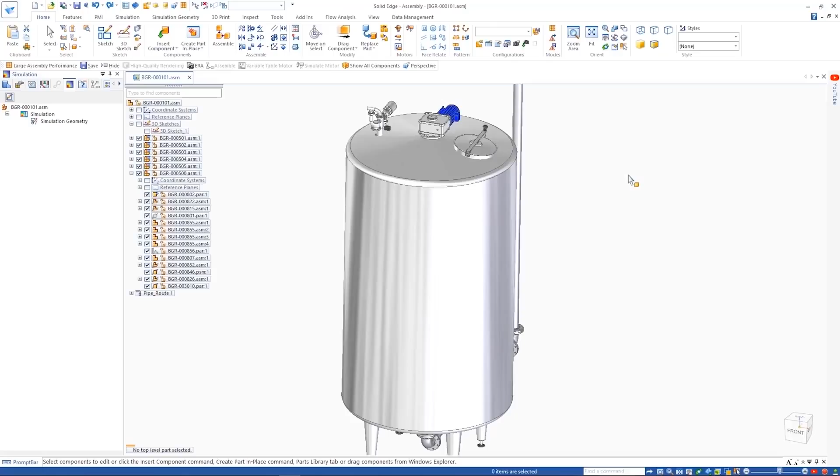Another great enhancement we have in simulation for Solid Edge 2022 is improvements to beam meshing. Here we're taking a frame structure and creating beam elements for the finite element analysis. Notice that the rigid connectors were automatically placed. We've improved significantly our ability to create those connectors automatically without any user intervention.

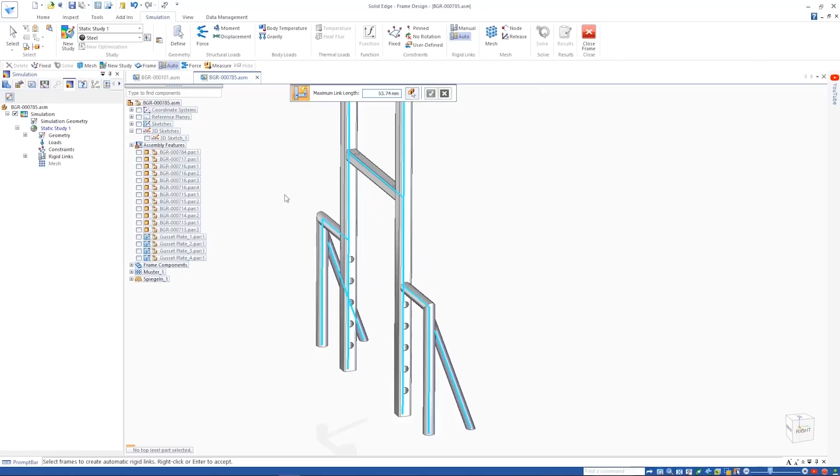Here the user has selected the bottom and changed some of the parameters to get the rigid connections correct. The bottom of the frame is then fixed, loads are applied, and the analysis is run. Once complete, you'll see some enhancements to the output, to the post-processing for this model. We now can post-process and display contours using von Mises stress, and we've also improved factor of safety stress contours based on those same von Mises stresses.

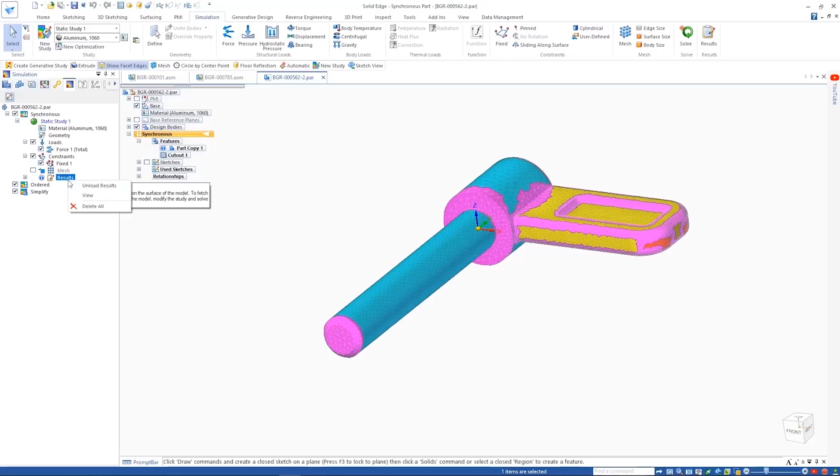Now back to the assembly, we're going to do another analysis on the pin within this assembly. You notice this pin is a mesh model. Simulation can now perform analysis on mesh models. You simply apply the boundary conditions, the loads and constraints where needed, and run the analysis. Here you see the result for the pin on this mesh model. And with that, Dan, I'll turn it back over to you.

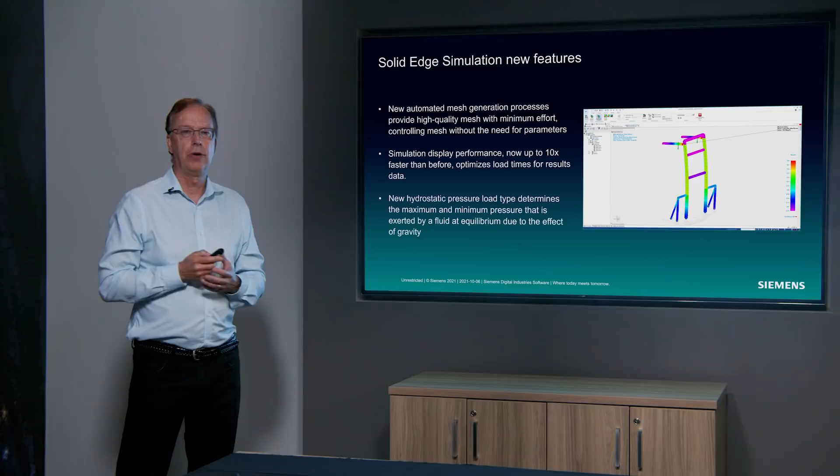Okay, thanks so much, Jeff. Lots of great new things in there. Obviously, the hydrostatic pressure load takes a lot of work out of the process for you. The way the beam elements are automatically connected together, great stuff. But also that body mesher. You can take a mesh that's very irregular, very difficult, and remesh it with the body mesher. It's a game changer for analysis.

Next up is Simcenter Flowmaster for Solid Edge. If you're doing any types of products where you have piping and you need to do analysis on the piping or design on the piping and the flow within the pipes, Simcenter Flowmaster for Solid Edge is for you. Let's take a look at how it works with Jeff.

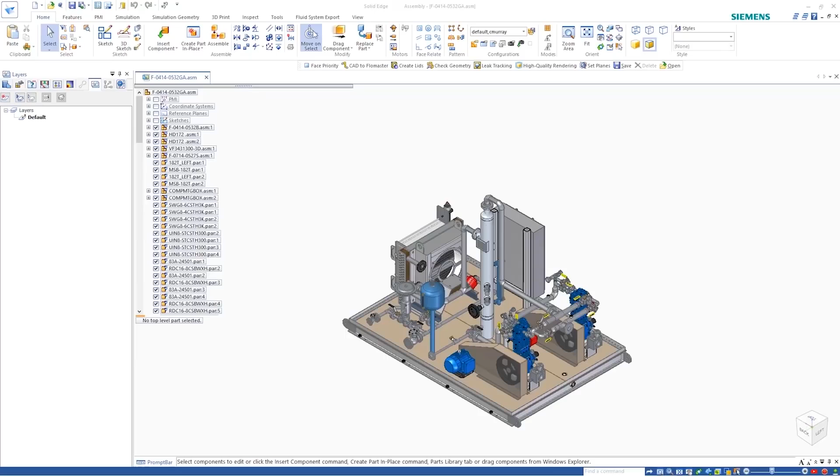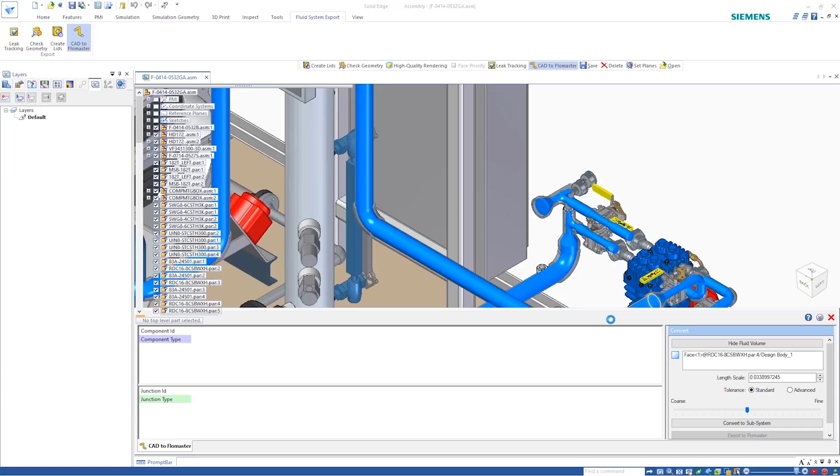Thanks, Dan. The unique CAD to Flowmaster technology extracts the geometry from the Solid Edge assembly and automatically creates the corresponding fluid volume that exists inside the pipe runs and components. During the process, a face can be selected to give the length scale and convert the system to a subsystem. The abstraction process is fully automated. There is also full control over the fidelity of the model, which can be adjusted with the slide bar. Individual elements can be inspected, deleted, and merged.

Once the network configuration is defined, the geometry can be exported to Flowmaster. Following export, the file will be saved for reuse, then automatically opened in Simcenter Flowmaster for Solid Edge in the Subsystem Import Wizard. The CAD geometry, centerline, and component connections can be seen in the wizard, and the model can be rotated to the desired projection when the network is created. On selecting import, a new subsystem will be created for review.

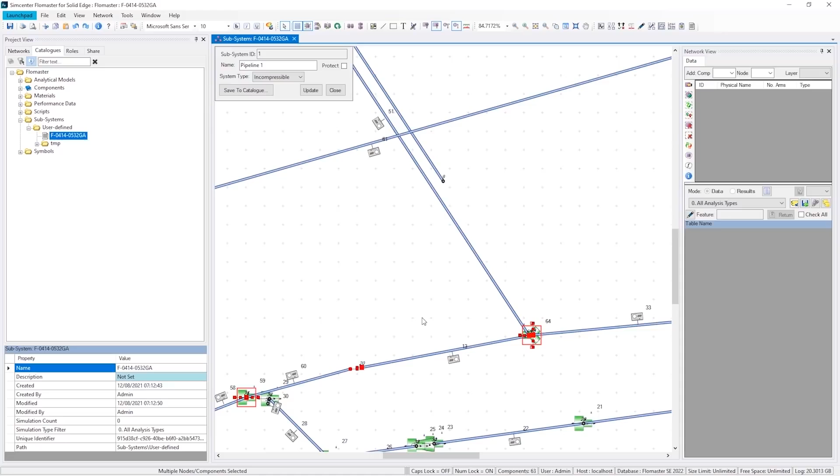The entire subsystem can be used to create a model, or individual pipelines can be extracted into their own subsystem. For a flow analysis of this model, we are going to extract the pipe from the two compressors to the center vessel. We create a second subsystem from the first and save it in the subsystem catalog. We'll now add the subsystem to a new network and specify the boundary conditions using pressure sources. We'll specify the compressor outlet pressure and vessel inlet pressures.

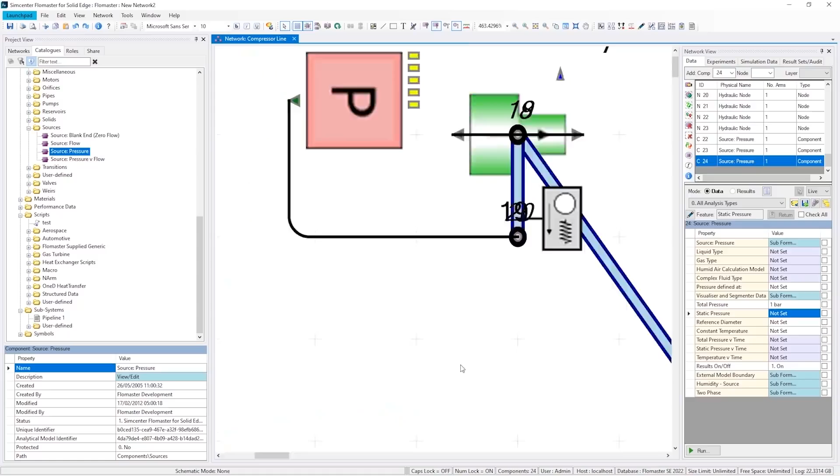For this low pressure system, we'll specify air as the working fluid and run a static simulation. Following the simulation, we can look at the results for individual components or look at the whole system using network visualization. With this, we can quickly oversee flows, pressures, and velocities.

Next, we'll look at the effect of a pressure pulse from the compressor on the system. We'll specify curves defining the pressure pulse and the source, and then run the transient simulation. Following the simulation, we'll look at the flow into the tank, where we can see the effects of the pressure pulse from the compressor. Then, moving to the compressor outlet, we can enable transient visualization to see the variation in flows, and that the larger flow is from the left-hand compressor. And back to you, Dan.

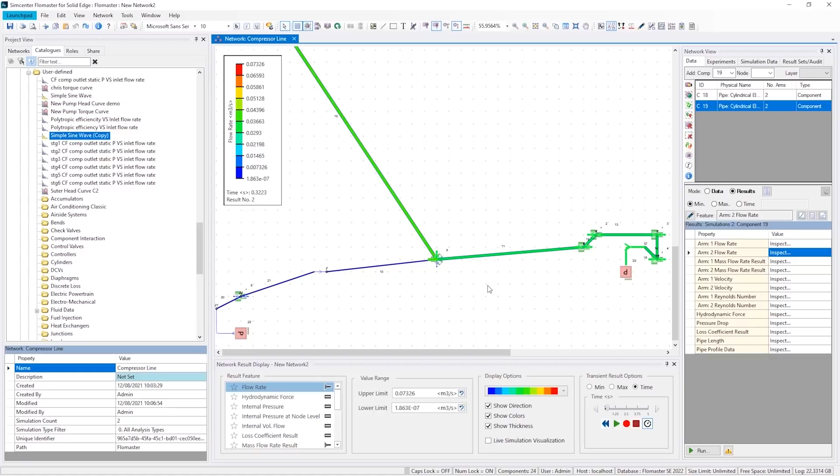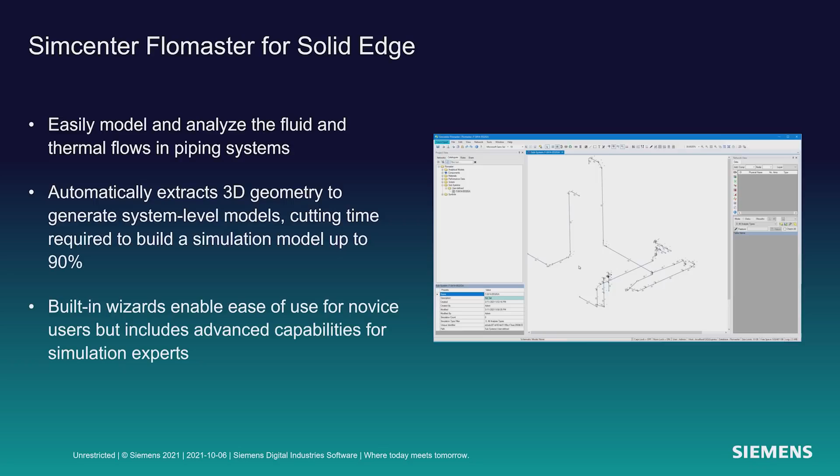Thanks, Jeff. Some super advanced technology there that we're happy to bring to the Solid Edge community. This is one of the advantages of the Xcelerator portfolio, the ability to bring advanced technology to you. Great capabilities here in terms of easily modeling and analyzing the fluid system. The great extraction of the center lines automatically from the 3D geometry, so you can go straight into that analysis and see what's going on with your system.

So that was a feature-packed release, right? We went through a lot of stuff, many things in Solid Edge 2022 that are going to help your business. I have to say, there's simply so many amazing things in there. The number of improvements are enormous. And I think that's been echoed by all of our beta customers. Everyone is saying, this is the best release of Solid Edge ever. And so much more. We're able to show you a lot of great things in Solid Edge 2022, but there's so much more to see and learn about.